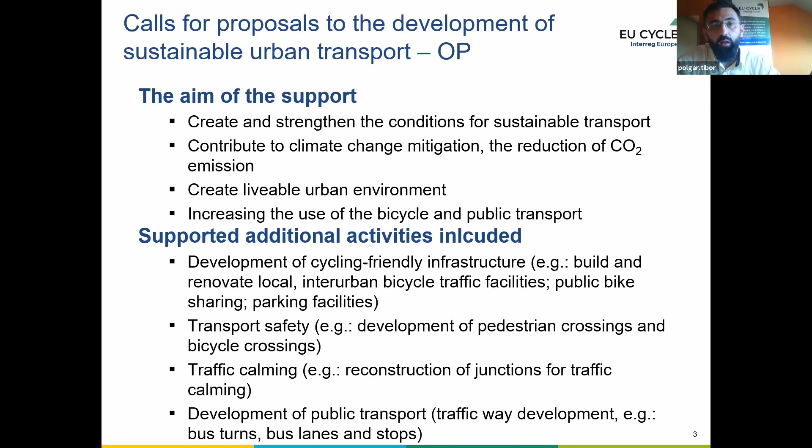In terms of the activities, I think an innovative element in these calls was that there were obligatory or compulsory accompanying activities, which all the applicants had to do in a city. These were, as listed here, awareness raising campaigns to change the behavior of the population towards a more frequent use of bicycles.

The modal share in Hungary is extremely high. The bicycle modal share is above 30% in most of the regions of Hungary, which has to do with traditions and, in poorer areas, the lack of cars and poor public transport in some areas. But still, we also have car cities, especially in the inner cities, and there were a lot of investments done in these cities, so it was quite a good thing that this was a compulsory activity in this call.

All those projects that planned to introduce a bike sharing system, which was also eligible from this call, had to do a feasibility study. All the projects had to do a road safety audit, and all projects had to use the National Technical Engineering Design Manual for Bicycle Traffic, which is an official state regulation, and it's prescribed for all planning processes, and when authorities are giving permits for investments, they are checking all investments against these regulations.

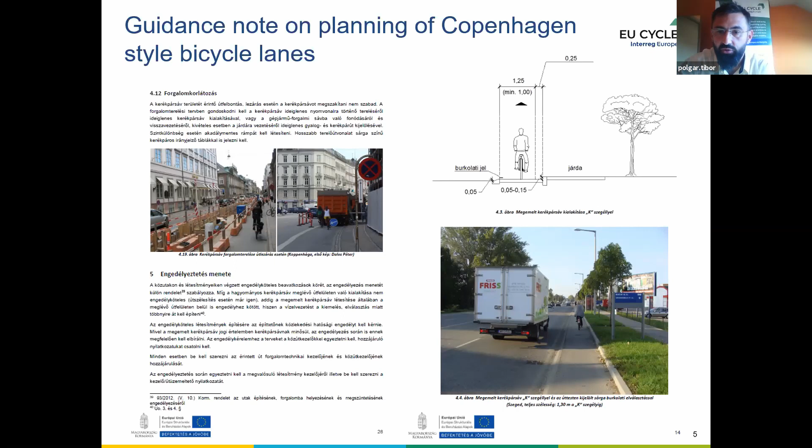You see some pictures here - this is Hungarian text, but this is how actually two pages of this guidance look like. It's illustrated with actual pictures showing how to do it and how not to do it.

There was a guidance listing recommended plants for different areas of Hungary - the endogenous plants that survive next to a bicycle lane, where cyclists can also survive, and where maintenance is not very costly because of the regular upkeep needed for the plants.

There was a planning guide on equal access to public services - mainly a guide for how you can design infrastructure for people with disabilities, and it had to be applied during this infrastructure planning as well.

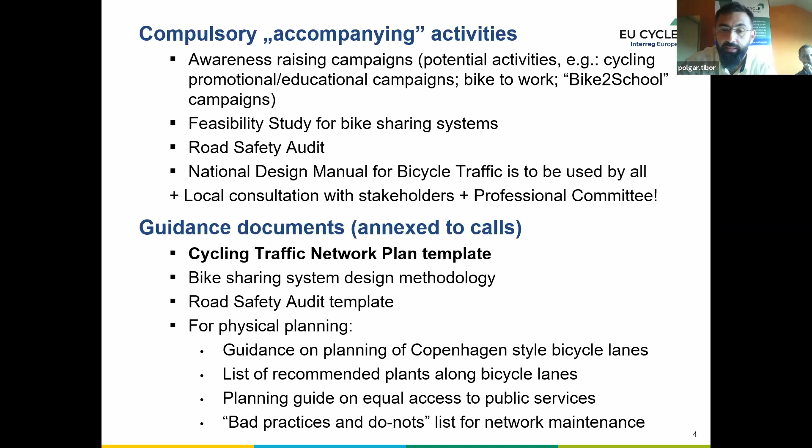There was also a guidance on network maintenance - what are the most important factors for authorities that maintain road networks. Of course all the cities and settlements receiving funding, more than 400 in these schemes, had to plan their infrastructure having in mind maintenance costs and how to do it and how not to do it. This was an important question throughout the previous course, and the managing authority prepared a guidance note on that as well.

In the following part of my presentation, I will speak about the cycling traffic network plan. It was really the core tool for these projects, tested in a high number of cases. There are big advantages, and also things that have to be improved in this methodology, which I will try to sum up when I present its content.

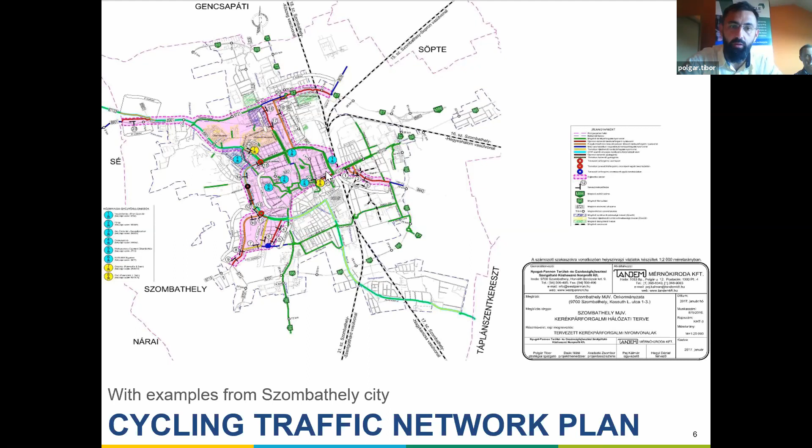So this plan, as a first chapter, had an analysis of the current situation. Before the investments, we had to list, present, and consider the relevance of all existing city development plans, spatial plan, transport plan, and existing cycling strategies from within the city and its surroundings.

We did this, of course. In Hungary, there is a national system for the road network, and the cycling network is part of this classified road system. We have one road that is of national importance, which we had to consider as an obligatory element in the plan, although it was not affected by any investments. But the city had to take some measures to improve this as well.

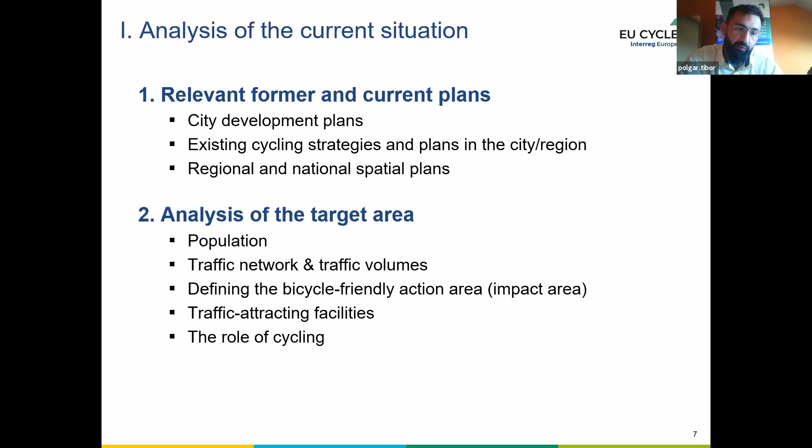We also had to do the general analysis of population, traffic network volumes, and define the bicycle-friendly action area, which you can see here.

It had to cover all the investments, and in addition, the call prescribed that once you design and define this area as a city, you have to install a general, quite high level of cycling friendliness, defined in detail within the whole area. This means that bicycle storage, resting places, and bicycle safety at high traffic crossings have to reach a general high standard within the whole area, either financed by the project or by city resources within the project lifetime, or in the plus 5 years of project maintenance.

So the network plan actually has to list all the minor investments, like installing bicycle storage at the marketplace, or improving the transition when cyclists switch from a cycling road to the main road, and the changes in surface level, for example. All these elements have to be listed and improved to a certain level.

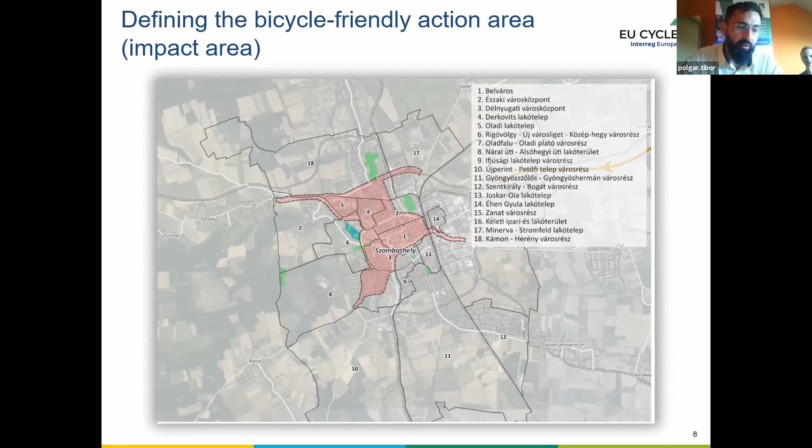In this plan, this bicycle-friendly action area had to be evaluated, and one of the main factors of designating and evaluating the area was the traffic-attracting facilities. So there had to be a complete assessment of schools, primary schools, kindergartens, universities, sport facilities, any facilities with a public function in culture, religion, health care, post, commerce, and public transport had to be listed. Actually, the main traffic-attracting facilities had to be covered by this cycling-friendly area.

We also had to evaluate the connection between these traffic-attracting facilities and the main areas of housing. In this map, you see the main housing areas highlighted with gray lines. These are the main blockhouse areas of the city, and we had to evaluate and show within the plan how cycling is happening and which are the most frequent cycling lanes within this area.

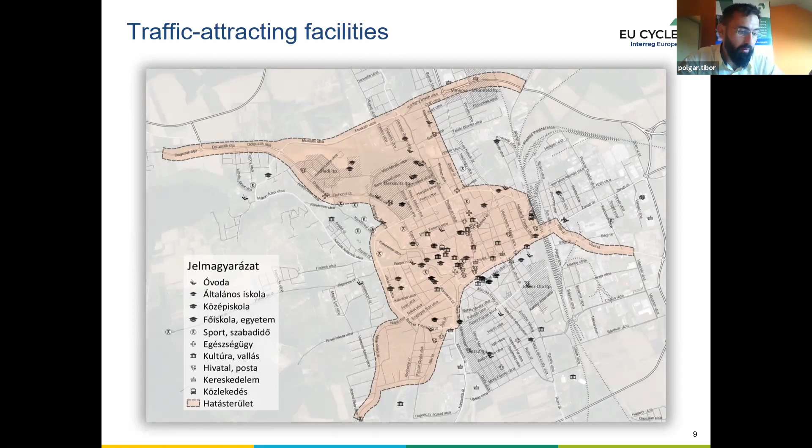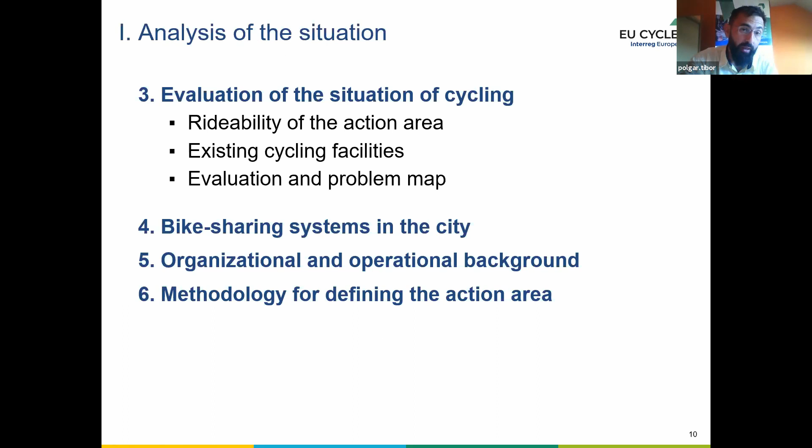Going forward, I already started how we evaluated the situation of cycling. The rideability and the existing facilities had to be documented. We had to prepare a complete description and photo documentation of all the main lines within this network area, between the housing and traffic-attracting facilities, including storage places, and with exact numbers. So we counted all the storage places within the city, and so did the other cities.

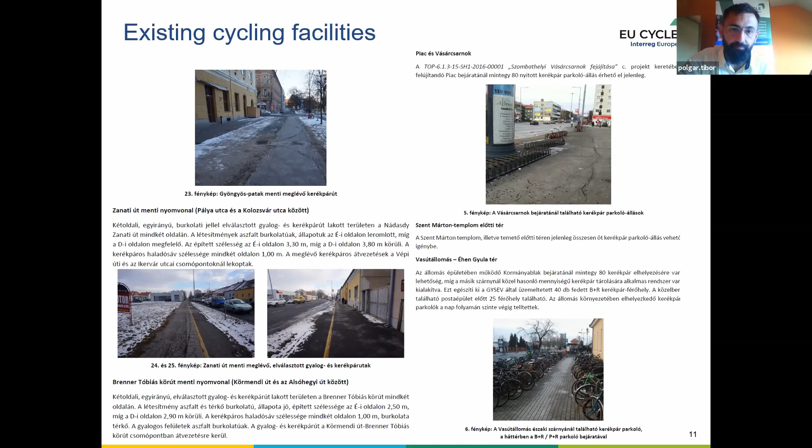The other main point of evaluation was here - this is a map about the traffic flow. Here you see all the cycling lanes that were most frequented by cyclists. The numbers on the right side represent the daily cyclist flow. Here you can also see the traffic-attracting facilities.

We don't have access to mobile phone trajectories like some countries have, such as Austria. It's possible to get mobile phone movements in a statistical way to look for trajectories of cyclists, for example based on their speed - you can filter out the cyclists. But in Hungary, we use traffic counting.

There is regular traffic counting that the bigger cities do, and the cyclists are also counted. But we had some sections where we had to make our own counting. There is a methodology for that, how to do it. It's not completely comparable, I think, how different cities do it, but within a city they use the same methodology during all the years, so it's comparable in time within the city.

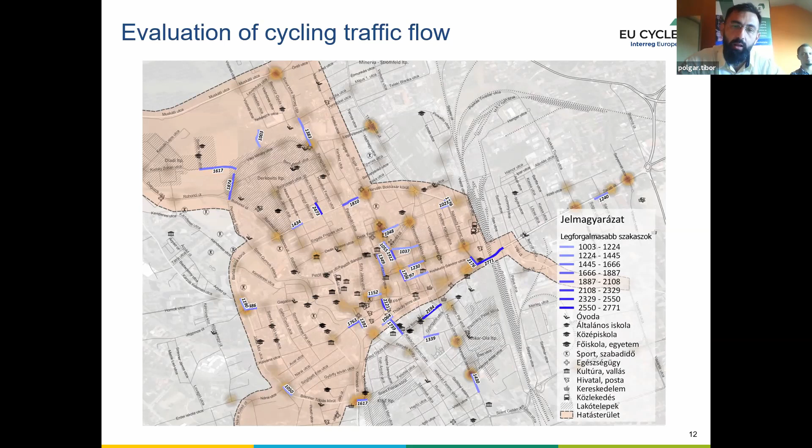The third aspect used during this network planning is a problem map. As we heard in the case that Sina presented from Euregio Rhein-Waal, the number of accidents and the type of accidents is really a factor. From the police, you can obtain data about this in Hungary. Here you see the accidents.

I don't know how far you can see the colors, but the blue ones are where there was only material damage. The yellow ones are the most frequent ones - light damages or injuries. Red is quite a lot, this is the severe injuries. And death is black - there was one case of death, unfortunately. This was prepared for the last 5 years, so all this data had to be investigated and evaluated before the preparation of the network plan.

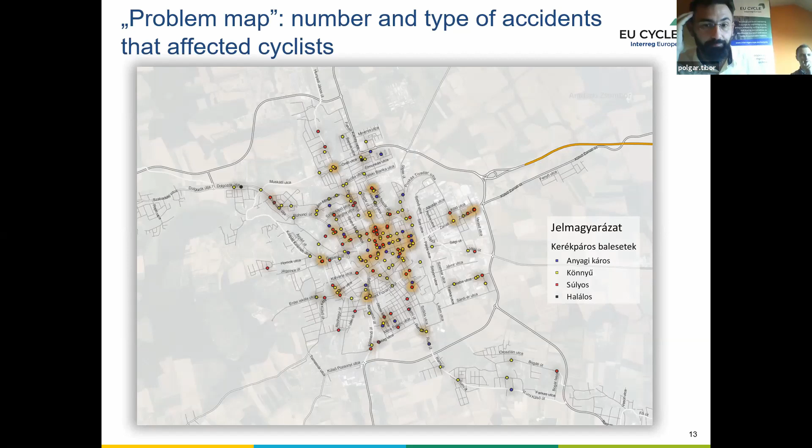This is a more recent improvement. The Hungarian police has reached a very high level of online presence, so you can get an up-to-date map of traffic accidents, and you can filter the different kinds of accidents quite easily from the Hungarian police web page.

This is for the first part of the network plan, and then we had to assess the development potentials. This part of the plan was about justifying the planned investments, presenting alternatives, and justifying the choice between alternatives - so it's like a feasibility study.

We had to start with a general chapter about compliance with relevant city plans for the current programming period, and the general constraints for developing cycling.

Here we went into details about the cycling habits in the city, and also about some infrastructural constraints like the location of the train station, the bus station, and the main roads, which are very frequented by car traffic.

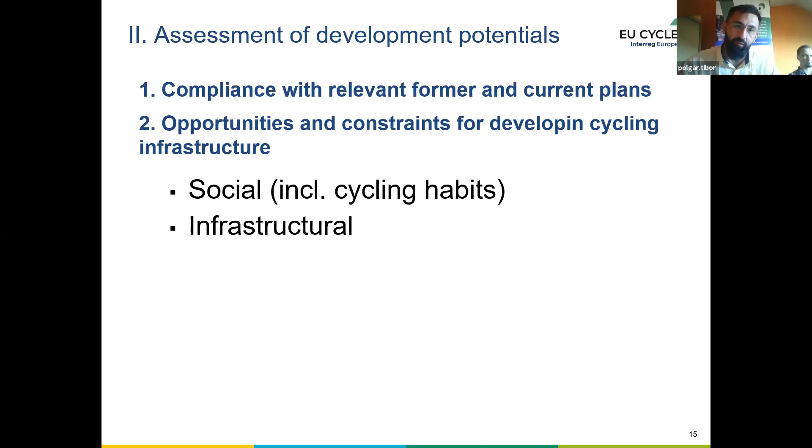Here we also considered future developments, like a planned new industrial zone at the northern outskirts of the city, which is expected to become a huge traffic attracting facility. We had to consider this as it was already existing in this network plan, which is of course about the future.

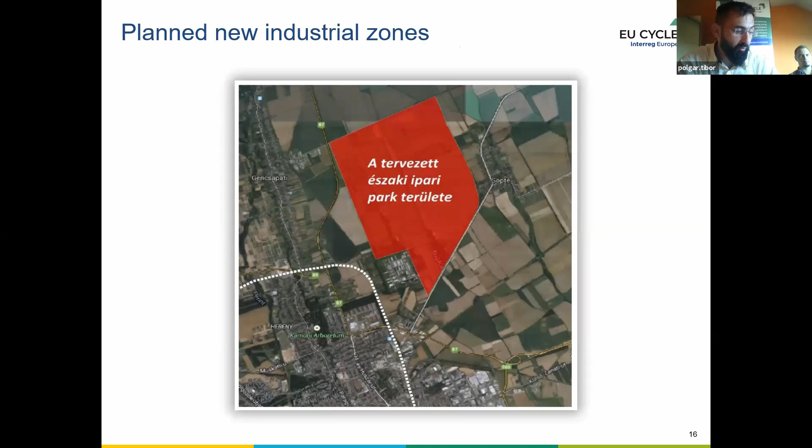In a plan like this, you have several infrastructure elements that you bundle together, and this bicycle friendly area is behind these investments, covering the whole area. In the third chapter, they have to be presented.

They can be upgrades of existing facilities, completely new bicycle lanes, bicycle parking places, combined crossings, roundabouts, some investments related to bus or train stations. This can be even signposting, and to install a bike sharing system is also an eligible cost.

So in this chapter, we had to present investment by investment in real engineering details - the sites, where they are, what kind of cycling infrastructure is introduced, what are the distances. These sheets we already received from the civil engineers working on this.

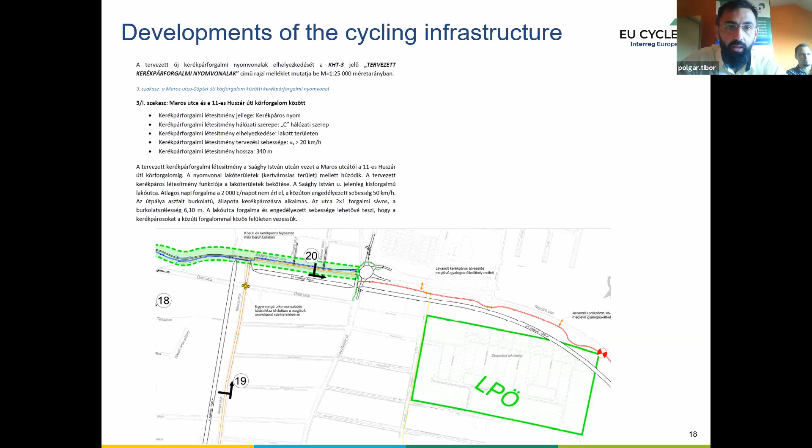There had to be photos about the current situation for each site, and then there was a cross-section of each investment, showing the direction of the cycling, what are the side distances at minimum - the minimal side distance along the section where pedestrian and car traffic goes, where main public utilities like telephone pillars are planted, and where the nearest plants are to the bicycle lane.

So this is actually quite a detailed document, and in Szombathely there were, as far as I remember, 12 elements in the plan. So we have gone through all of them.

Here alternative solutions had to be presented, and justification at the engineering level of the chosen solution had to be presented.

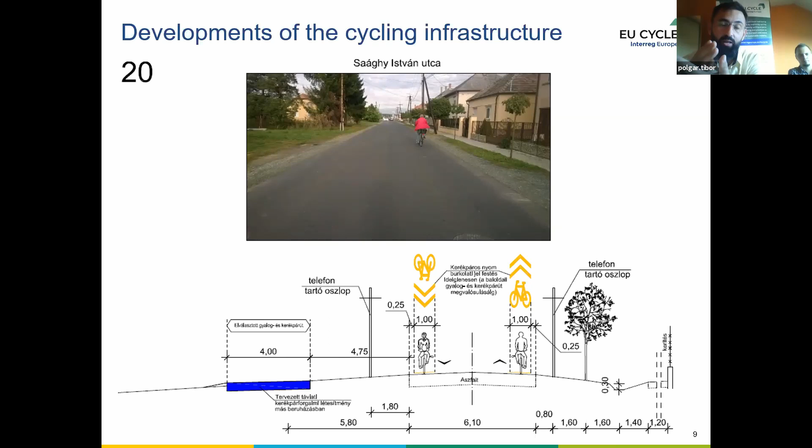Of course, as I said, the local consultation and also this central planning committee has reviewed these solutions. So this was the main bulk of the consultation - whether these solutions are right or not, in terms of engineering, usability, and safety - and there were also changes.

When we prepared this network plan, we had to list all the existing capacities for bike parking. We had to document them, and we had to prepare suggestions how to improve them.

All cities had to do that. For example, in most cities, these are old school bicycle storage facilities that are not really cycling friendly, and this U-shaped new type of bicycle storage places are more efficient because you can plant 4 bicycles next to them, and these don't harm your bicycle so much.

So here in the network plan, we have listed all the locations, we have listed some missing locations, and on the short run and on the long run, we have listed what kind of changes are needed to make this area a real cycling friendly area in terms of bicycle storage.

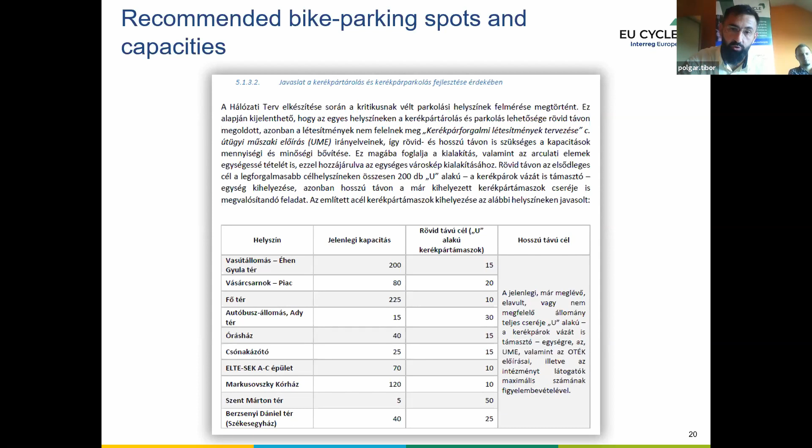Then the bike sharing system. There was a difference in the planning if a city chose to introduce a bike sharing system or not. Most cities above 70,000 chose to have one, like Szombathely also chose to have one. And it's really a question whether it's viable in such size.

And if the managing authority could participate now, they could tell you that in a lot of cities they planned to have it and then they skipped it. Because in this size of city, between 50,000 and 80,000, it's really questionable how sustainable, in financial terms, a bike sharing system can be.

We had to do here in Szombathely a complete feasibility study. The outline structure and the main contents were stipulated in a guidance note annexed to the calls for proposals, and we had to do an alternative analysis of different technologies to use. The one presented for Bialystok was one of the options, but we have considered the other newer technologies, including mobile technology with a pillar type of station.

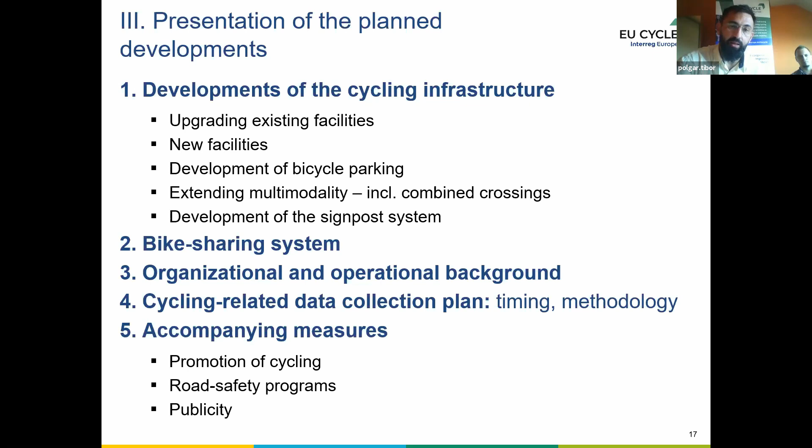Yes, we had to present accompanying measures in detail. So we didn't just list all the infrastructure elements and infrastructure solutions, but this network plan had to come back on these compulsory elements that I mentioned in the beginning of my presentation: on awareness raising, on improving road safety through behavioral change of the population, and making efforts about the publicity of the improved cycling network and bike sharing system.

We detailed these measures in the network plan. There had to be a chapter about the compulsory project publicity tools, of course. And what is important, I think, is that all these network plans are introduced by the Central Line Ministry into a national database. So here you see for our city what is in this national level central database, and the Line Ministry is providing this database which includes all the bicycle lanes of the country.

And the cities who get the financing have to provide the data about the status and the itinerary, so the exact locations, physical factors of the investment, and then they are introduced into the central system. So this gives a quite good overview of what is happening in terms of improving the cycling network in the country.

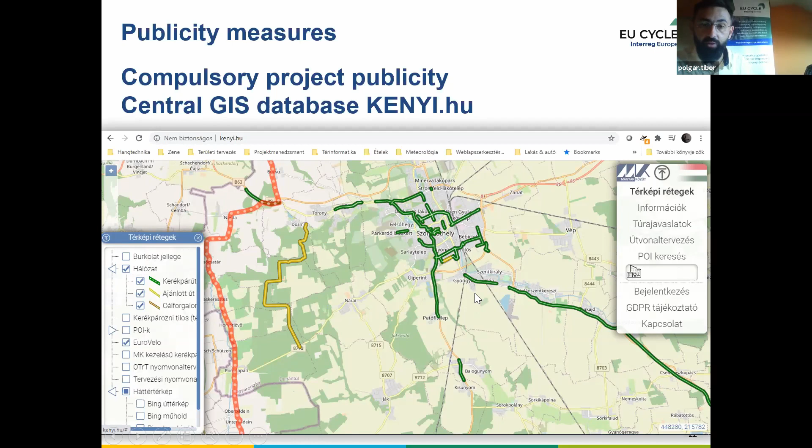And the last part of the cycling network plan was an implementation plan, which was not overcomplicated. This was just a sequencing of how these different stages will be implemented. It is very important to keep a city functional during all these investments. So this was a logistic and engineering plan on what to invest, what to improve first and what second.

And in the last minutes of my presentation, I want to talk about the results of this course and probably what could be learned from this process. So here you can see that it's altogether more than 1,000 billion forints in this OP. Out of that, 125 billion has been invested into sustainable transport measures.

There were two kinds of projects. This first column shows around 257 million euros, the funds allocated for counties. So these projects have financed bicycle investment in smaller cities and between smaller cities and villages. The 35 billion forints, which is around 100 million euros, has financed infrastructure in bigger cities. And altogether, these are more than 400 projects in more than 400 settlements.

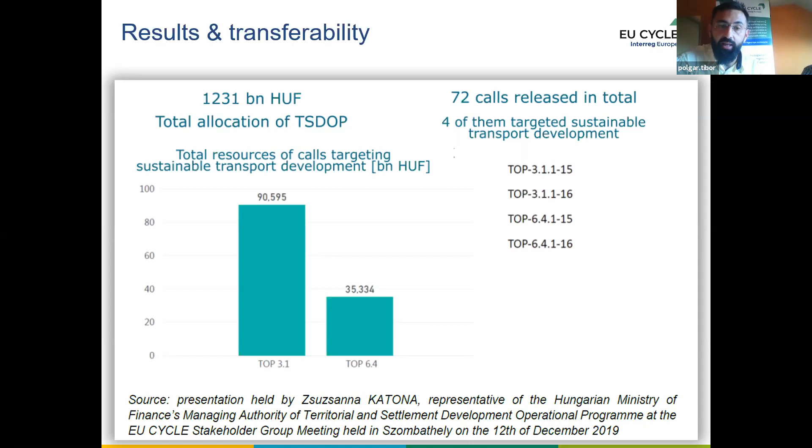These were 4 calls, so each of the 2 types was launched 2 times. Altogether 4 calls, and that's how these projects were selected, and most of them are still under implementation. But it is already possible to aggregate the indicators, and I think it's always important, if we are speaking about a policy instrument, an OP, a call for proposals, or any other tool, even an integrated territorial investment strategy, you have to enumerate indicators, and these indicators were quite simple, and there are even some problems with aggregation.

So length of established cycling facilities of any kind, number of cycling friendly settlements, these are those who have a cycling friendly network plan, number of newly established traffic calmed zones, and number of settlements carrying out road safety development are the indicators.

In terms of traffic calmed zones, it was quite interesting that the methodology used was ambitious. So all the cities with big housing zones had to evaluate the traffic situation within the housing zones, and in our city there were some housing areas that were not traffic calmed at all, with a very high population density. And in these areas, the city had to take the responsibility to turn them into traffic calmed housing zones with very low car traffic speeds. This is just in brackets, but this is behind this indicator.